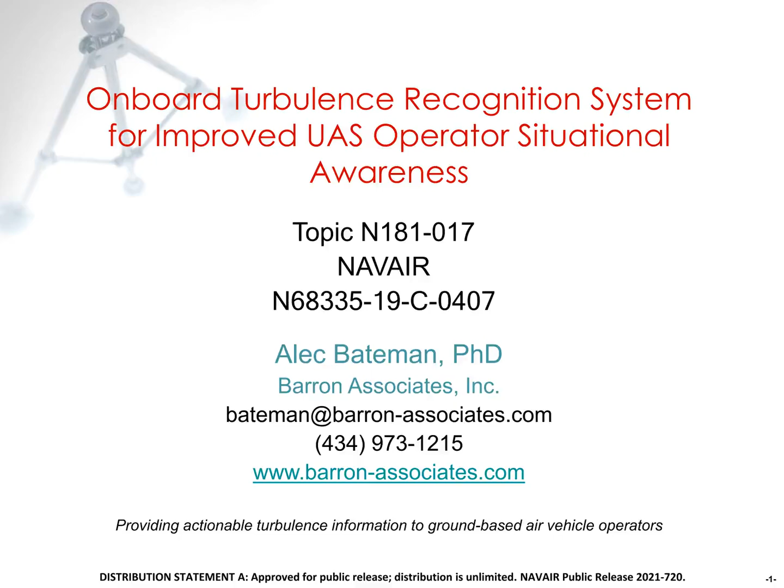Listen to this talk on our onboard turbulence recognition system for improved UAS operator situational awareness. The goal of the system is to provide actionable turbulence information to ground-based UAS operators, restoring an important aspect of situational awareness that has been lost in the move from manned to unmanned aircraft.

Barron Associates works in areas including guidance, navigation, control, and mission planning, atmospheric sensing and modeling using air vehicles, and human and machine interfaces. We've also worked extensively on verification and validation and assurance of safety-critical algorithms. Notable recent demonstrations of our technologies include testing of both pilot-in-the-loop and fully automated upset recovery capabilities, and a flight demonstration of our turbulence recognition technology using a manned general aviation aircraft as a UAV surrogate. Flight testing of the turbulence recognition technology took place last summer.

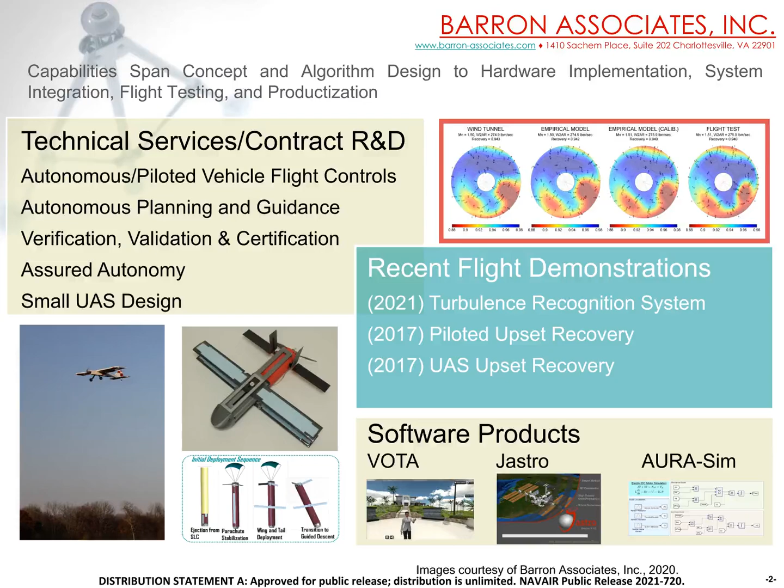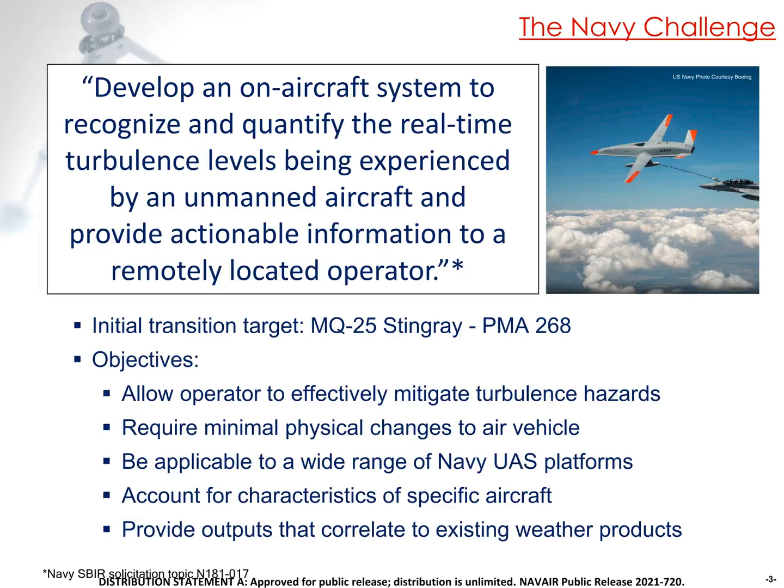The need identified by the Navy is to develop an on-aircraft system to recognize and quantify the real-time turbulence levels being experienced by an unmanned aircraft and provide actionable information to a remotely located operator, with MQ-25 as an initial transition target. Key objectives identified by the Navy are to support effective mitigation of turbulence hazards by ground-based operators while minimizing physical changes to the vehicle, to work for a wide variety of aircraft and to account for the characteristics of those aircraft, and to provide outputs that correlate to existing weather products.

Operationally, appropriate responses to turbulence are important to maintain safe operations, minimize maintenance requirements, and maximize vehicle lifetimes. Onboard pilots of manned aircraft can of course readily feel turbulence and can effectively assess its severity and take appropriate corrective action, but ground-based operators lack the motion cues the onboard pilots rely on. The goal of this work is to provide an automated system to quantify turbulence and to provide actionable information to operators. Providing this information in a way that relates directly to aviation weather products is one aspect of making it easy to understand, and relating turbulence severity to the limits of the vehicle is another important aspect of the system.

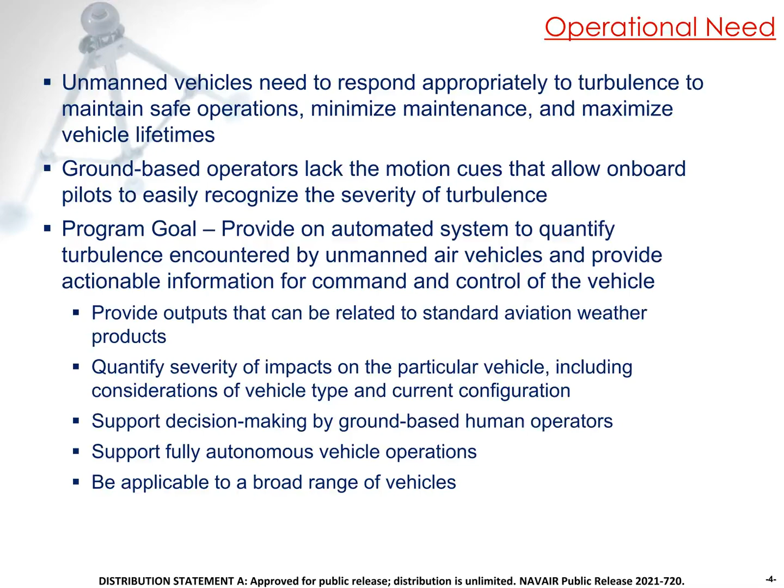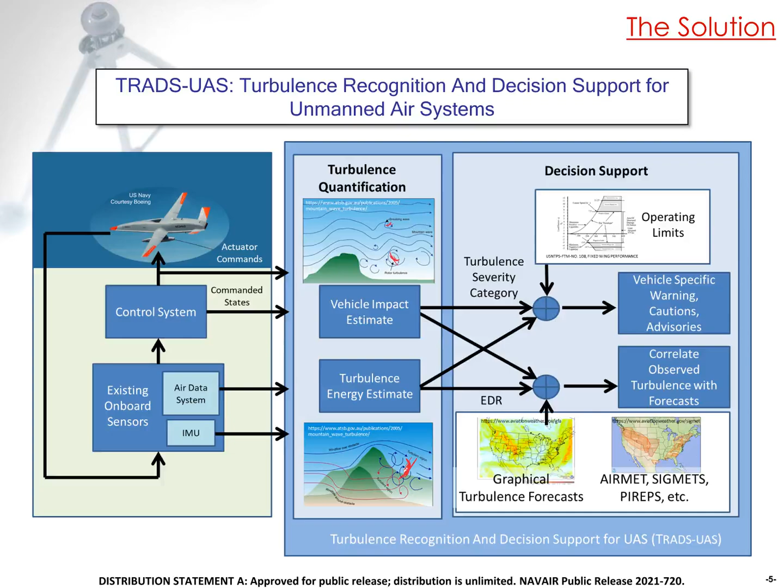This diagram shows key features of the Turbulence Recognition and Decision Support System, which we refer to as the TRADS-UAS system. The system relies only on standard flight control sensors present on nearly all UAS, so no hardware needs to be added. It employs a two-pronged approach to turbulence estimation to support correlation of outputs to existing aviation weather products and to support generation of vehicle-specific warnings, cautions, and advisories.

The first component of our two-pronged approach to turbulence quantification is the turbulence energy estimate component, which estimates the energy in the atmosphere in terms of eddy dissipation rate, or EDR, which is the metric most commonly used in aviation weather products. This measure of turbulence is purely a characteristic of the atmospheric conditions and is independent of the type of vehicle. In addition to relating directly to turbulence measures in aviation weather products, this component is well suited to supporting information sharing across heterogeneous fleets.

The second prong of our approach is the vehicle impact estimate, which provides a measure of how severely the vehicle is being impacted by turbulence, motivated by turbulence severity category definitions, which relate to altitude, airspeed, and normal acceleration perturbations. The system provides warnings, cautions, and advisories that conform to design standards for the particular vehicle and reflect the operating limits of that vehicle. The development approach includes extensive flight validation with a selection of flight assets motivated by the initial focus on large fixed-wing UAS. The initial flight demonstrations I mentioned previously made use of ground-based LiDAR to provide independent turbulence estimates to validate the system.

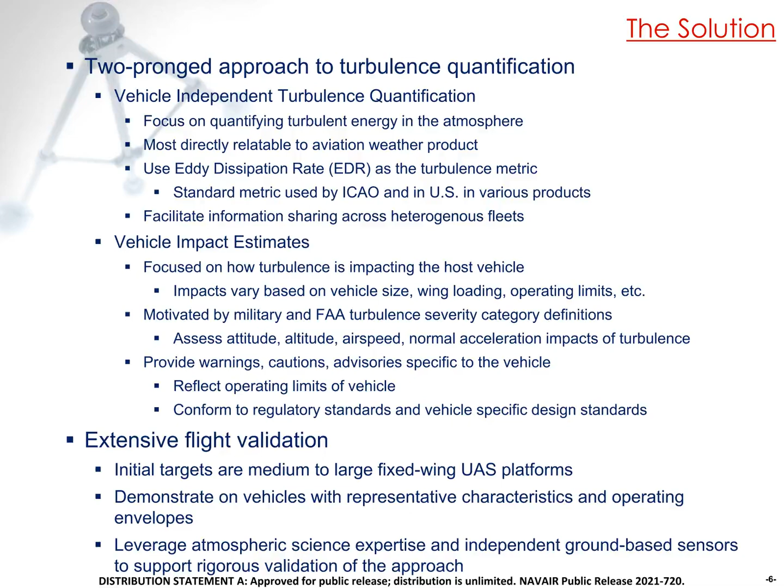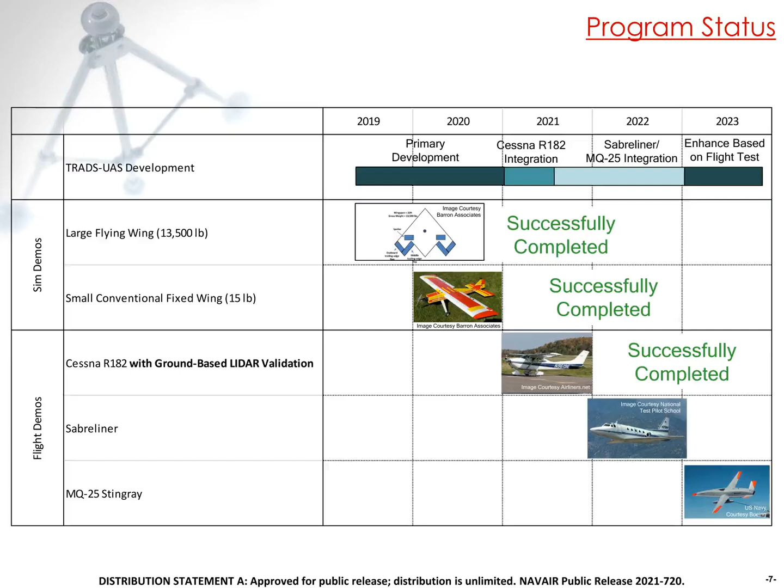This slide provides a very high-level overview of the program with an emphasis on demonstrations. We started out with a couple of simulation demonstrations, and as I mentioned, have now completed initial flight validation with a general aviation aircraft as a UAV surrogate. Next up is validation on a business jet to get speeds and altitudes more representative of some turbine-powered UAS, again using a manned aircraft as a UAV surrogate. These manned vehicle demonstrations provide an opportunity to get manual turbulence reports from the flight crew, providing an important validation measure. The final flight demonstration will be in conjunction with flight tests of MQ-25, and we will run on the ground station hardware at the Atlantic test ranges for this demonstration.

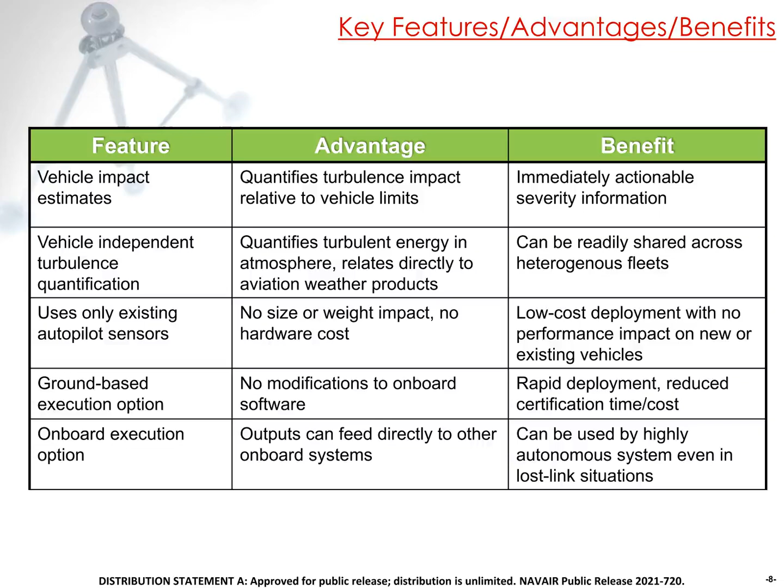Key features of our system include the two-pronged turbulence quantification approach that I have already discussed, which provides directly actionable information, as well as facilitating correlation of TRADS-UAS outputs to aviation weather products and supporting sharing across the fleet. By using only existing sensors, we require no hardware changes, have negligible power consumption, and can be deployed on new vehicles at low cost. A ground-based execution option, which will be used in MQ-25 flight tests, eliminates the need for mods to onboard software, which can further reduce deployment time and cost, while an onboard execution option will support future deployment of the system to support highly automated and autonomous turbulence responses.

We hope to transition the technology either directly to the Navy or via a prime contractor, licensing the patent-pending technology and providing technical services to support deployment on new platforms. Key milestones are successful flight demonstrations, including real-time system operation on the 3 previously mentioned platforms, which will culminate with the MQ-25 demo in conjunction with flight tests at the Atlantic test ranges. As previously mentioned, the MQ-25 is our initial transition target.

We think our turbulence recognition technology will be particularly valuable for MQ-25 given its aerial refueling mission. Even turbulence levels that are within the operating limits of the vehicle may be undesirable for refueling operations, and the capability to reliably identify such conditions and reposition the MQ-25 into calmer air before the receiver aircraft arrives will offer significant operational benefits. Other Navy transition targets of interest include the RQ-21 and MQ-4. I would also like to note that we are actively developing technology for rotary wing platforms as well.